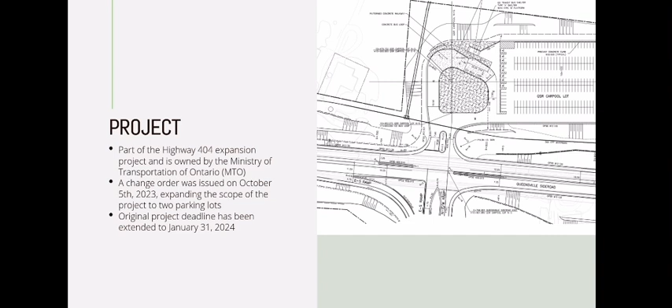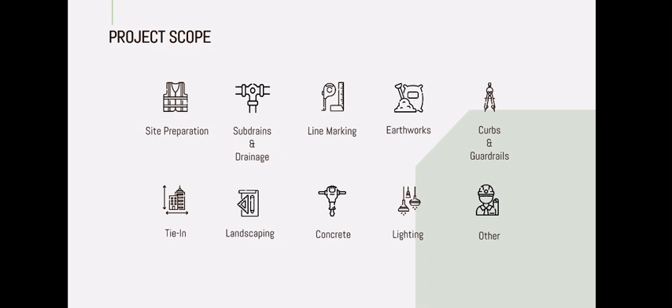Based on the information provided by the client, the following items are part of the project scope: site preparation, sub-drains and drainage, line marking, earthworks, curbs and guardrails, tie-in, landscaping, concrete, lighting, and other miscellaneous activities.

The client also provided us with some constraints. We can only get our soil procurement from Y&T Works. We need to take into consideration sustainability, account for Canadian weather, and create a safety plan. Additionally, our site must have proper traffic management, dedicate 2,000 square meters to mobilization, abide by the premiums for equipment, and aim to be completed by January 31st, 2024.

The following covers the project schedule. We're going to have mobilization taking place on November 1st, 2023. Earthworks will end on December 13th, 2023, and similarly, aggregate works is going to be completed by January 3rd, 2024.

Concrete and paving is going to be completed on January 12th. Other miscellaneous activities are going to be finished by January 17th. While considering 2 snow days, this will bring our project completion to January 23rd, 2024, which is 8 days ahead of the client deadline of January 31st, 2024. Based on the incentives provided, this will result in $40,000 in bonuses.

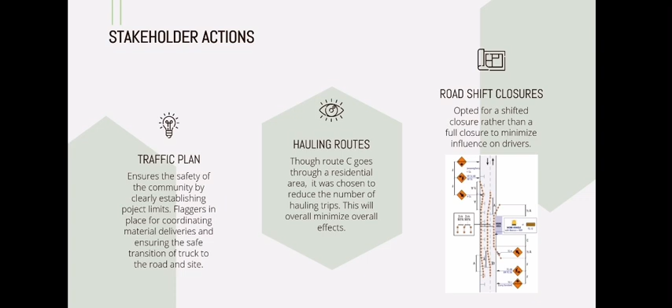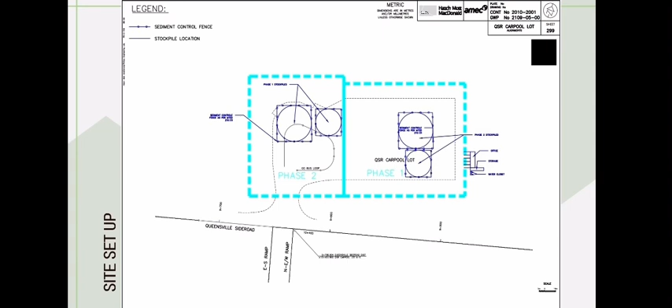Moving on to our next section, we will now go through our proposed staging plan for earthworks. Our team estimated cut and fill volumes based on the CAD drawings provided by the client, and we found disproportionate amounts of cut and fill volumes between Site 1 and Site 2. To save time and costs, we decided to mix the fill in 4 stockpile locations, each located where fill work will be done in each phase.

We are proposing a staged approach that allows all required cut material to be initially stockpiled where its fill work will take place. In the later stages, all other cut material will be exported to Y&T Works, while clean fill material will be brought back on the way.

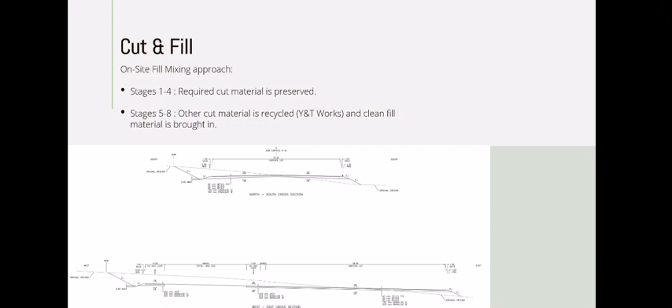As previously mentioned, the cut material is stockpiled to each site's fill location, which will be ready to be mixed with well-graded material from Y&T Works.

After Site 1 Phase 1 excavation is complete, Phase 2 excavation takes place. Some of the excavated material is taken to Site 2 to be stockpiled, and we're calling this stages 3 and 4, as shown in the red arrow.

At the end of the excavation cycle, the remaining cut material that we do not need will be taken to Y&T Works to be recycled, and in return, clean fill material will be brought back to be deposited on Site 1's Phase 1 and 2 stockpiles, which are shown in the green circles.

In Stage 3, cut material is allocated to Site 2's Phase 1 fill location, whereas for Stage 4, it will be allocated to the Phase 2 fill location.

At this stage, all required cut material for soil mixing has been preserved. In Stage 7, Site 2 Phase 1 excavation is being done, and all cut material must be hauled to Y&T Works for recycling, with fill material being brought back to the same location.

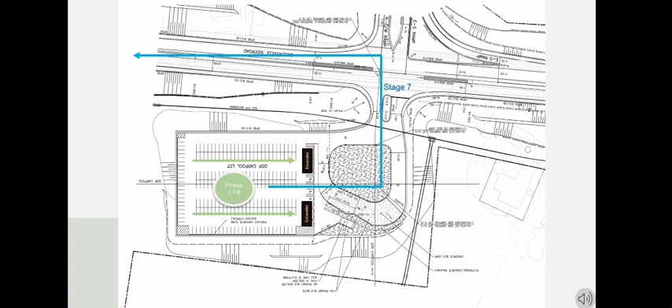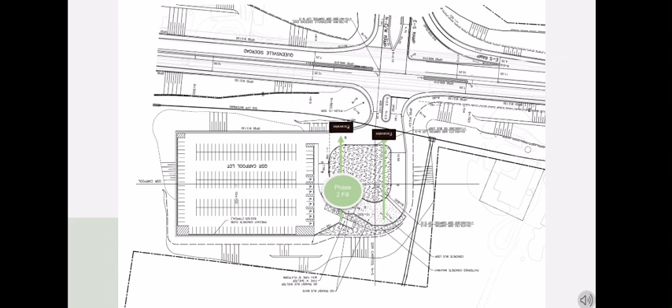Finally, in Stage 8, Phase 2's excavation work is being done, and all the cut material is hauled out to Y&T Works again, and fill material is brought back to be stockpiled to the Phase 2 fill location.

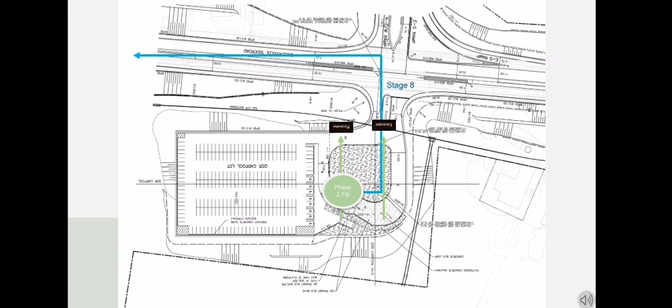Following earthworks, we move into our next stage, which will be drainage-related servicing.

Drainage servicing will include ditches which are cut in by excavators A and B during earthworks in order to facilitate overland flow, as demarcated by the yellow line, and underground drainage facilitated by pipes, as demarcated by the red line, which will be installed in trenches cut by excavator B and laid by pipe layers.

Backfilling of the trenches will be completed by dozer B and a vibratory compactor to ensure proper 95% backfill compaction is achieved. All components of the construction process, other than earthworks, will be completed symmetrically for both sites.

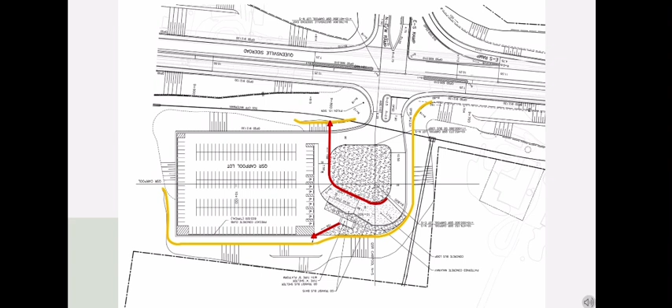Following servicing, we will move into top works, consisting of granular works, concrete, and paving.

First, a crew of dozers and a vibratory compactor will be used to spread and properly compact a 350 mm lift of granular B base for both sites' parking lots. Material will be imported by dump trucks from Strata Aggregates.

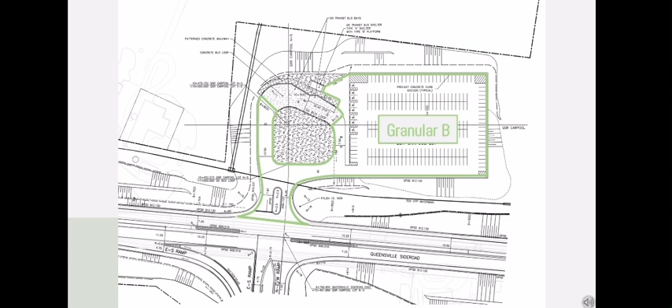Next, the same crew of dozers and vibratory compactor will be used to spread and compact a lift of granular A material under the parking lot and under the concrete slabs to prepare for surface works. Similarly, material will be imported from Strata Aggregates using dump trucks.

Paving works will be completed for both sites simultaneously using a paving machine and shuttle buggy. One of the 3 lifts of asphalt will be completed each day, with asphalt being supplied by Plant 2 and each lift being properly compacted by a vibratory compactor.

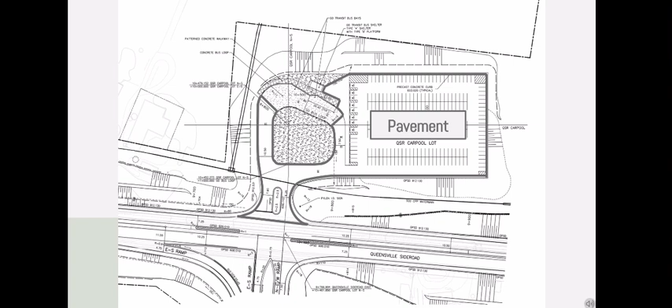Similarly, the concrete for all concrete-related works will be supplied by Plant 2, with the plant delivering concrete to site using ready-mix trucks. The concrete slabs will be formed and poured over a 3-day period, and the concrete pavement will be placed in a single lift using a slip-form concrete paving machine.

Lighting is an important aspect to every construction project as it ensures the safety and comfortability of all of the end users.

The lighting diagram shown provides an accurate map of the areas each pole will cover. The larger circles are 100 lux while the smaller circle is 20 lux. All the lighting utilizes warm LED bulbs to provide safe lighting that doesn't cause as much light pollution.

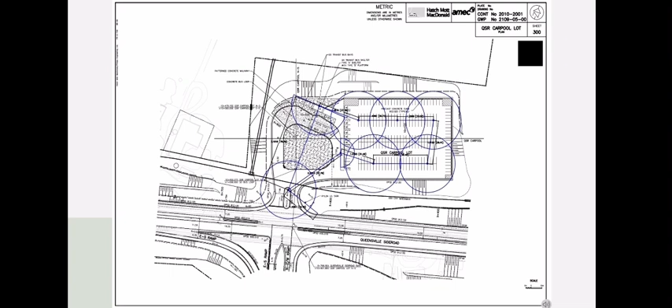The light poles will have a concrete base to prevent any accidents, and the wiring will be laid underground as shown after the granular materials.

We broke down the costs into 5 sections: topworks, site organization, earthworks, site servicing, and granular and surface works. The largest of these 5 sections was the earthworks at $4.7 million, followed directly by granular and surface works at $1.3 million.

After we got our total budget, we added 2.5% for insurance, 6% for profit, and then 13% tax, bringing our total to $8.2 million.

Overall, the construction of the 2 carpool lots on Queensville Side Road and Highway 404 will last from November 1st until January 23rd and cost a total of $8.2 million.